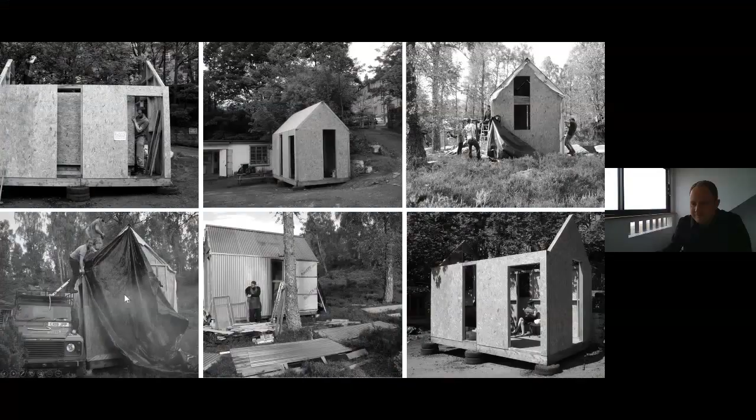Hi there. So as Kate was saying, I thought for today's presentation I'd focus on my role with the Bothy project, as it's got its roots in delivering small-scale projects in pretty wild and rural settings, in particular in the Scottish Highlands. So the first slide here is the project started life as a collaboration between an artist friend of mine, Bobby Niven,

and we received a successful grant application to the RSA. I think the original grant was only for about £5,000, which is a challenge to build any kind of scale of building for, I think. You'll agree. I think eventually it worked out at around £12,000, albeit with an army of volunteers. So as you'll see here, with a bit of youthful exuberance and more than a bit of naivety maybe, we started building our first Bothy in the car park at Edinburgh Sculpture Workshop with no end site agreed.

So we had the idea being to shift it north as a residency space for visiting artists to encourage an escape out of the central belt. So the immediate challenge for me as an architect, going wholly against my training and practice ethos at the time, was how to design a building with no site in mind to react to. So we decided from the outset to keep it as simple as possible, aim to create something that could be homogeneous to an entire region or country even, or evoke a character of an imagined context. So it was a fairly emotional response rather than any kind of analytical reaction to a predetermined site.

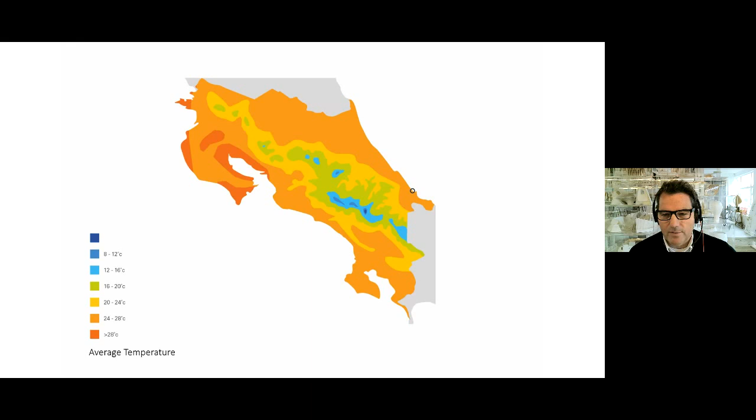Consistently warm temperatures, a tropical and subtropical environment, between 24 and 28 degrees average in Cahuita. Using natural winds is very important for us, with a slow movement of wind from the sea, from the Caribbean coast.

Our site is on the outskirts of this small touristy town, with some fishing and growing of bananas and coffee in the region. We're surrounded by a cluster of other houses, all facing the sea.

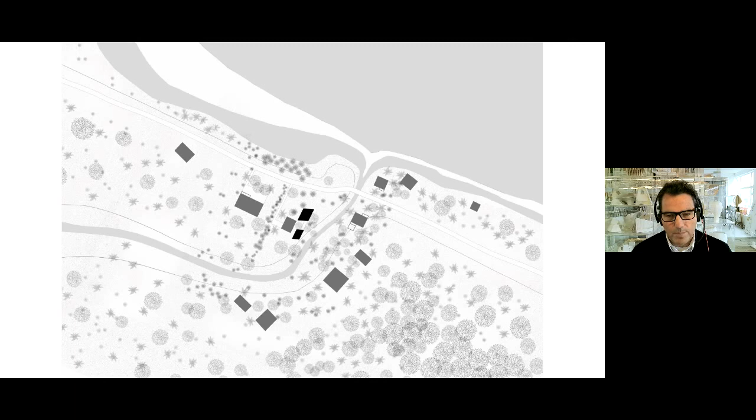We had an existing house. This town is quite a sleepy place, population of 2,000, with a certain amount of tourism. Our site is right on this black sand volcanic beach, which is quite wild, and facing the other way connects to the coral and the national park of Cahuita National Park.

Our site is dissected by a small lane that sits between it and the sea, and our view of the sea itself. The site had an existing house and a number of very tall trees that were important to the project and attractive to the client. One rule we had to work with is that no trees were to be cut down.

They were a kind of psychological barrier to the outside. Essentially, you live outdoors and all you do is protect yourself from the sun and from the rain - those are the two primary drivers of any project.

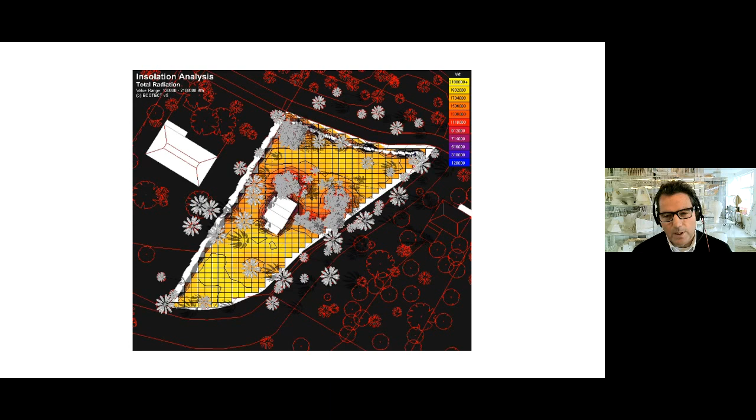Our initial analysis hoped that the canopy of trees would protect our site from the sun sufficiently that we wouldn't have to worry about it too much, because you feel the canopy's presence very much in Costa Rica. But we realized we had to develop a way of protecting the building from the sun and the rain, while still allowing expansive views to the sea and back to the jungle.

Through this process of working out the optimal site and form, we found we needed a space of about 100 square meters for this main studio, in between the trees. We realized that by rotating this form to a twisted parallelogram, we'd overcome a number of issues at once.

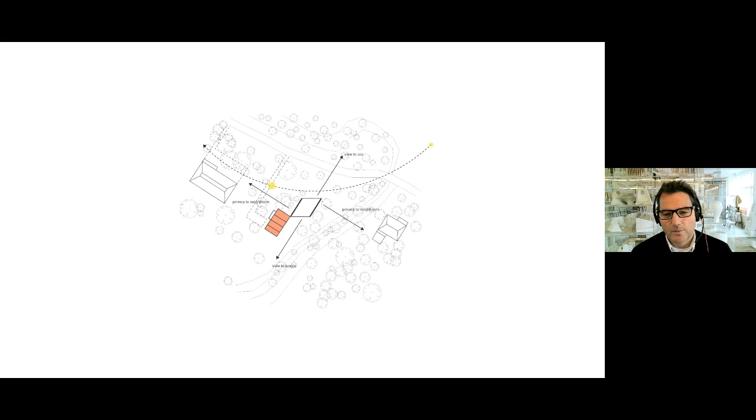We'd have a roof that would fully protect from the low sun as it rose and came over the house, and then as it set in the afternoon, from the glazing that faces the sea and the jungle. At the same time, this shift gave us ways of overcoming privacy from neighbours and controlling views. A number of iterations of this form emerged, looking at how the timber structure might work.

In section we ended up with two raised pavilions. They're raised up off the ground to protect from termites and other animals, but also to promote the breeze from the sea, which is important for the natural cooling process we were looking for. The two pavilions are separated so they're out of each other's wind shadow.

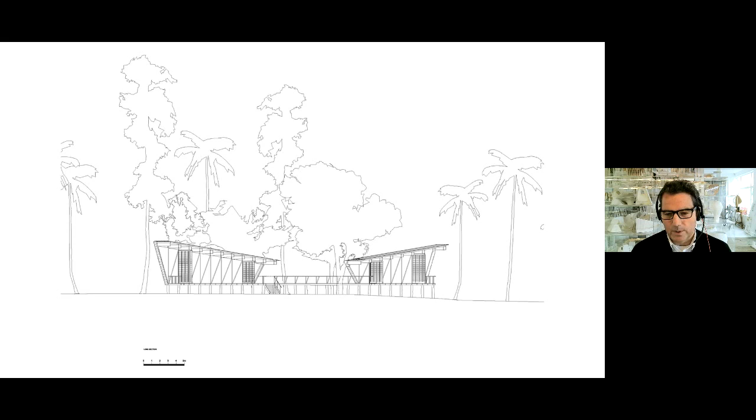The main pavilion facing the sea is the study, and the rear pavilion faces the jungle and is a bedroom. In between them is an external walkway that became a very important social space between the two.

Now, it's built entirely of local materials for a number of reasons, but the primary one was that there are no other available materials in Costa Rica at the time. It was a very limited palette to work with, but also very enjoyable, given the knowledge they had of the various timbers you could use.

This is an ironwood called kasha, which is extremely heavy and dense and was used for the piles. And then laurel is used for the main structure above ground.

Although we had to source it specifically for our project because we had lengths of up to 10 meters in our building. We tried to communicate remotely with drawings but found that very difficult. Eventually, I went over to Costa Rica with models of the house and essentially had to explain to the contractors: we want this model built exactly like this, but a lot bigger over there. And that was the process we went through.

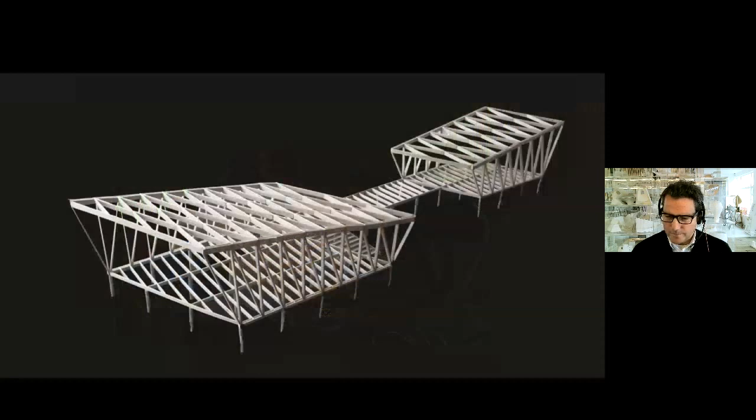So with these models in their hands, and also crucially the junctions of every single different junction within that building, we were able to explain what they had to do. And suddenly there was this very nice way of overcoming the complexities of the project, just with a straightforward way of communicating, which is through physical models that we always like to do anyway.

And there are junctions up to 8-way junctions, so you realize how important they are - not only that they're important, but that we'd solved them three-dimensionally for them before they started work.

So the site we located between the trees, and we dug the piles into the ground about 1 meter, and there's a small concrete pad footing. Then the platform is built up off the ground, about 1 meter off the ground. And then the superstructure emerges from that.

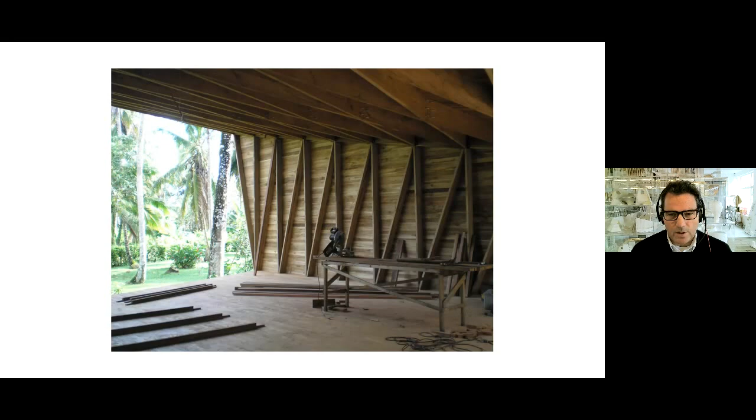So the structure is then clad in timber, and then after the timber it's clad in waterproofing and insulation, and then corrugated iron.

And it's very finely tuned to this context. The 10-degree pitch of the roof is from the material itself. And the angles of the front and back are specifically to do with protecting the glazing from the sun. This is the connected walkway you can see between the main studio and the bedroom.

And the brief was a studio for a writer - actually my father - and he had 16,000 books and a grand piano. And the scale of the project actually emerged through housing that many books as much as anything else, as did the height of the space itself, which is up to 4.5 meters on the seaside.

And then when you look in the other direction, it's very transparent. So we fully glazed the two elevations, which are 10 meters wide, with a louvered glass, which is a local material that can slide open, and you can also rotate to control the air movement to keep the house cool.

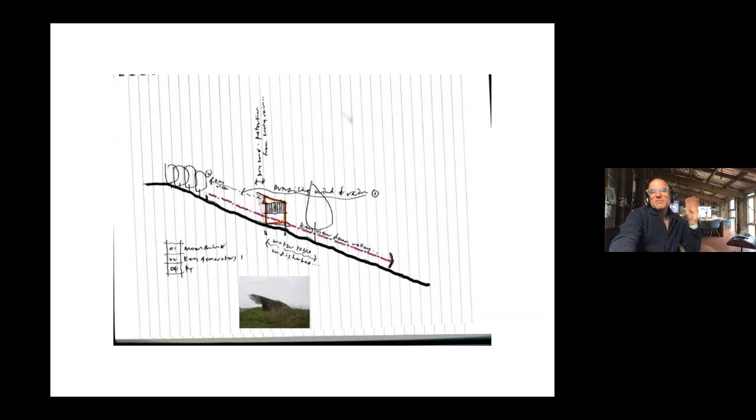The importance of this slide is to show that everything we consumed, everything we produced, had to be carried initially down this 500-metre long path, because originally 20 years ago we had no car access to the building we bought - and that made us aware of the weight of our own consumption. The house, the first building, was a kind of reductive sub-Murcuttian, simple, lightweight pavilion that opened up and sat in the shadow of this big ash tree and touched the ground lightly.

As Kate mentioned, I worked on the Design and Make programme, and what was really fascinating about it was how ordinary our moves were. We designed buildings, detailed them, and delivered them with contractors in a super straightforward manner. I began to really question what I was doing in a context like that, where, as Sophie from Buro Happold once said, you think you're so radical, but where are the non-architects working with you? Why are you just being an architect? Of course, we mistake radical making for radical thinking.

So this woodland that we're in now has informed much of how I began to steer a path away from that. And this programme in particular that Kate and Gianni talked about, Studio in the Woods, has been super influential for me. And this is Studio in the Woods here 3 years ago in an ordinary building that my neighbour built.

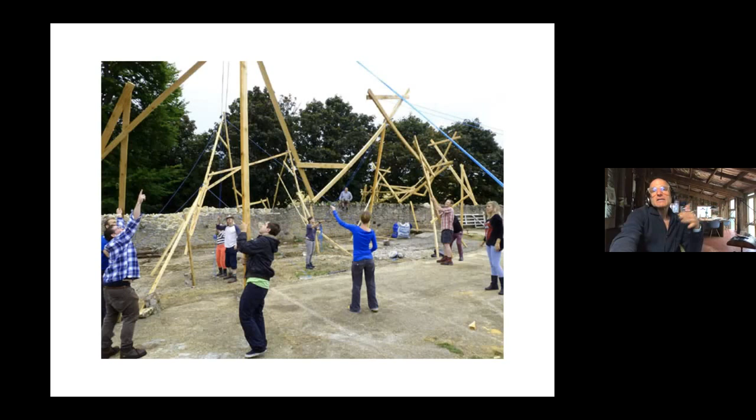all as this kind of seamless and interwoven path of decision making. So when I look at a building like this, it isn't a random crazy collection of sticks. It's a super logical exploration of an idea about how something could be made, and then it's a map of the embodied act of lifting things into place, which is then frozen in time. The building that I'm in now is the first proper building that we did in the woodland that set out to do things differently.

It just took the trees that stood on the site that this building is on, and it used a 2-day milling process to do the least amount of milling for the least amount of money to get one good face on the timbers that needed to meet another timber. The drawings that we began to do were drawings where everything could go on one blackboard, and it was the result of one conversation.

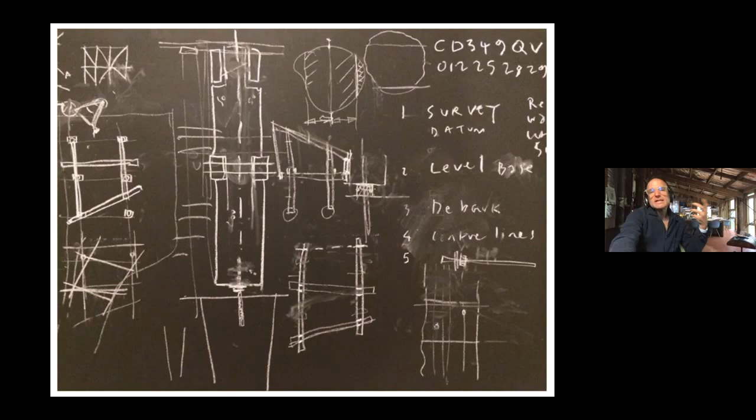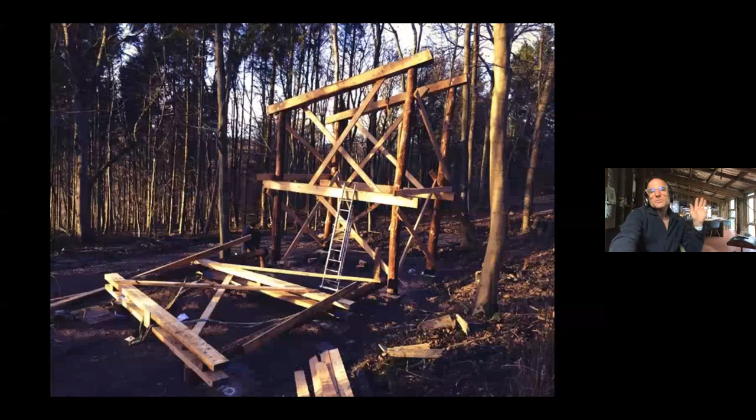Every detail is on this drawing. There are no dimensions because the dimensions are given by the pieces, the embodied length of the materials that are then used and laid up on top of one another as a template for the next one. So nothing is measured. The building's set out on site and built then with a digger. Diggers are super cheap. If you get them over Christmas, you can pay for 2 days and get them for 2 weeks. My neighbour's brother is a digger driver.

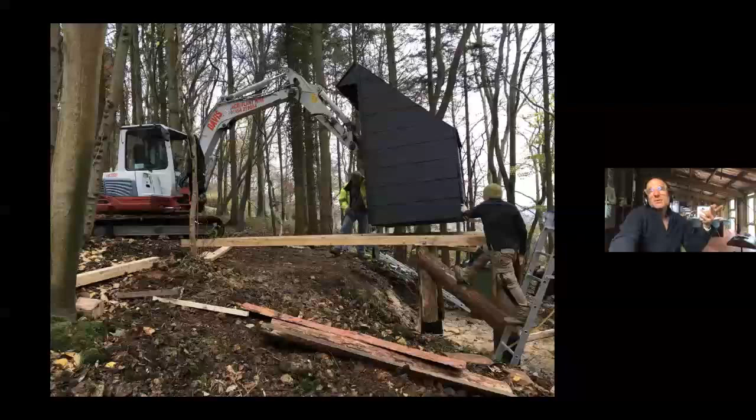And I've just 3 more little buildings that we've done since then in a similar vein. The next building was a zero waste building where we just used the waste material that we had around, zero waste, zero cost, to make a tiny little outhouse for the studio. This is at this time of year when the wild garlic is at its height. We built that again with a digger and my neighbours, who didn't ever sense that they were making anything. They were doing making in a way that the AA might call this rarefied activity.

We didn't invent any details beforehand. We just made this thing, plonked it on the site, and now this is our bathroom. And it's trying to really not be willfully ad hoc, just make something in a very direct manner where you explore and negotiate with the contingencies of what I call real engagement, rather than trying to idealize a set of arrangements before you make them.

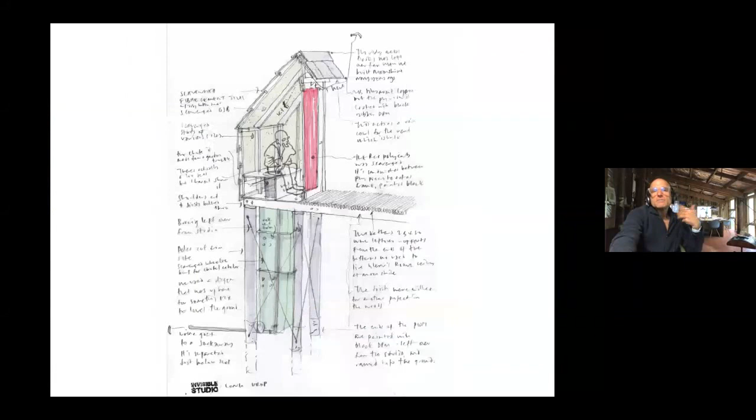And again, what it also allows me to explore is that process of drawing, which in this case we did after the building, and finally, in this case, made a model. So it's a kind of weird reverse process.

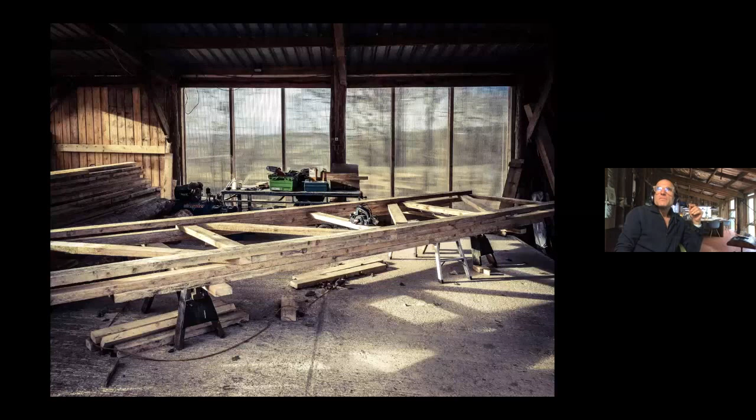So I'm interested again in this idea of the material as a sort of generator of an idea. And I was highly influenced by Carl Andre's Equivalent 8 that he did in the Tate 30 odd years ago. And someone wrote that fantastic book, which was, is this art or is it bunk? Is it about the arrangement of fire bricks in a pile that made it interesting? Is it the material? What is it about this material that's interesting? And he just used the same material.

So we had a glut of timber one year. I got it all milled into 5x2 because I thought I could build anything out of 5x2. And this was then the first equivalent building that we did, just used everything out of 5x2. And that was the only thing that we knew we could do, just use this. So when things were long, we had to make trusses. When they were thick, we had to laminate them up.

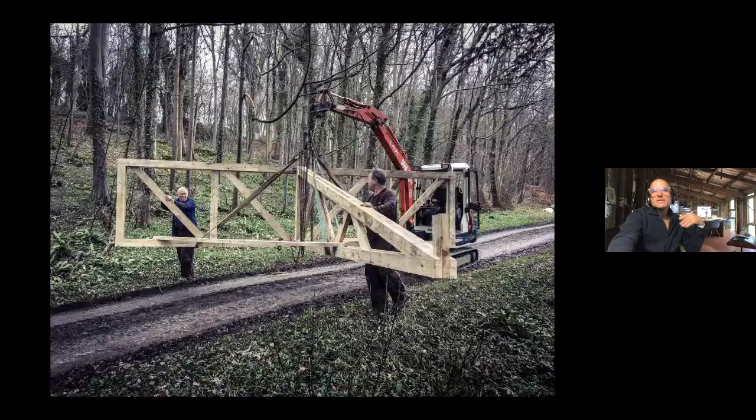We then carried it down with a digger and made it into a little kind of prototyping barn. You can see my neighbour's skills getting better. And this is then just sort of clad again in stuff that comes from our local fabricators. Equivalent 2 was then a little house that we made for my daughter. That's a kind of relocatable building that sits just down here.

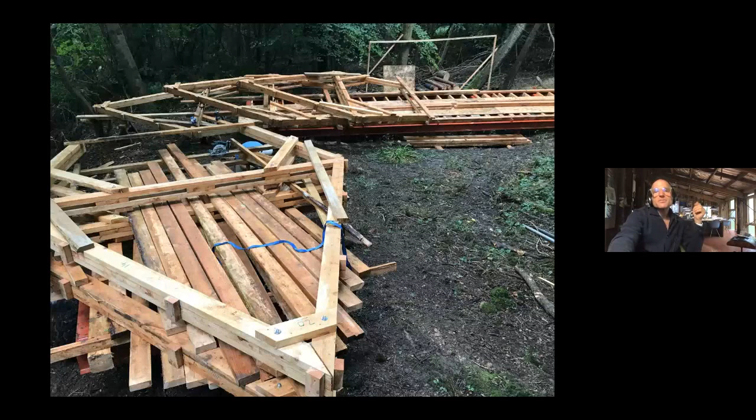And that was again, same 5x2, made in the barn, laid up as a template, the next one going on top of that, and then taken down on the trailer, which became the base of this, well, it is called Trailer, in fact, the project. And then my neighbours, again, no sense they were making anything in a formal way. They were just doing what, you know, rural, resourceful people do without overthinking it.

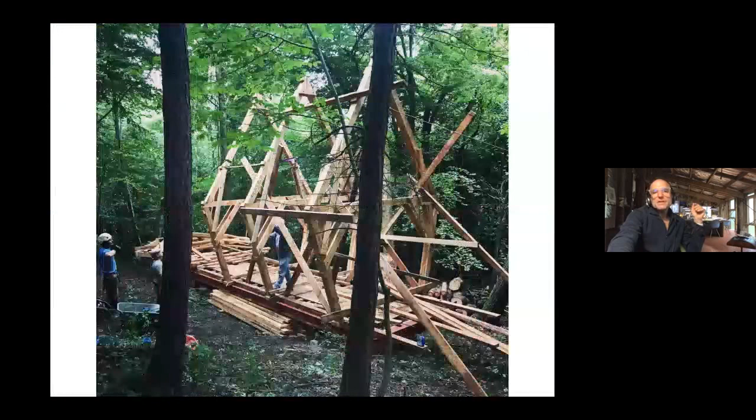And then finally, what's kind of interesting is the house that I talked about 10 years ago, which was this sort of incredibly formulaic, you know, Murcuttian, quasi-modernist, self-conscious building. We've now revisited and stripped away some of those slightly naive, bad A-level essay type moves, and reverted it to a more ordinary sense of building, which is free now to adapt and move.

And as we've been living here now in the last year, I've carried on making changes to the house again. So the last thing that we've done, as of a few weeks ago, is just put a new canopy up outside the back door as a kind of first mark of doing something new again, having stripped away the original house completely and with it sort of killed off my youth.

I'm going to finish just on the point of these projects: it's not that they're projects that are interesting in their own right. They're all quite badly made sketches, but the idea of these buildings is that they all inform the other much bigger projects that we do as part of practice. Thanks.